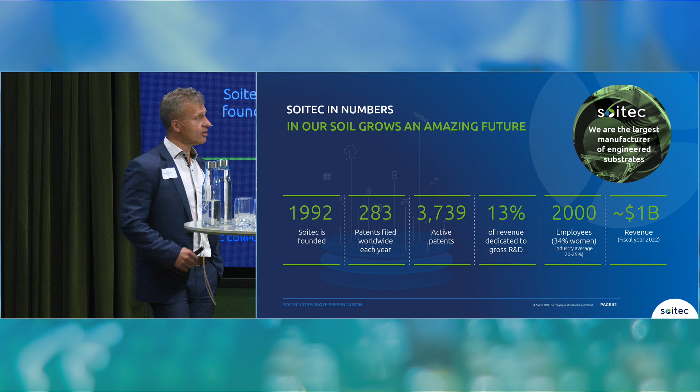So in a few figures: we have 283 patents filed worldwide each year, a total amount of patents of 3,700. 13% of the revenue is dedicated to our R&D. We have 2,000 employees worldwide and a revenue last year of $1 billion.

As I said, green innovation is key, and when you work on green innovation at the substrate and material level, you can leverage a lot of things because you are kind of agnostic, whatever the technology. We provide substrates for power electronics, for computing technologies, FDSOI, etc. So that's what we try to do.

Sustainability supports value creation and strategy. We drive the transition to a sustainable economy with innovation and operation. We leverage our inclusive and inspiring company culture and act to become a role model for a better society.

We are implanted also worldwide. So in France, in Bernin, we have a small capacity of production of gallium nitride, in Belgium, and another big factory for 300 millimeter in Singapore, and others are mostly support and sales offices.

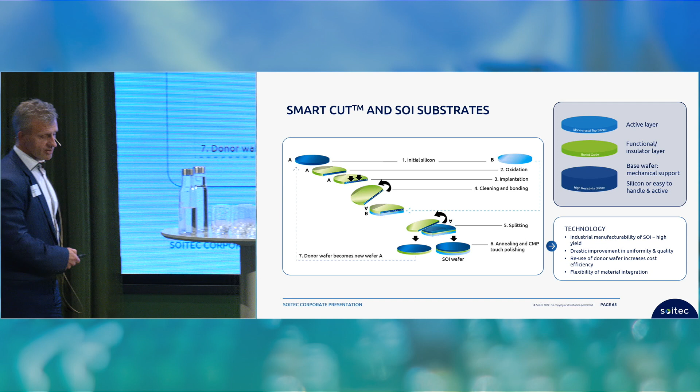I don't come back on this smart cut slide because I extensively talked about that. But basically, we can bond and we can smart cut quite everything on anything.

And we can target with the different materials, wafer A and wafer B, different applications. So you see the added value of the substrate material.

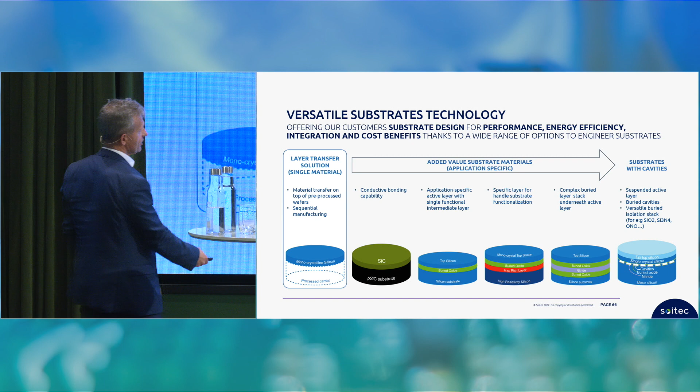For instance, the SmartSiC: this is the conductive bonding capability, and the fact that the polysilicon carbide here is very low resistivity. So the conductivity is very good, and you have gains at all the levels of the value chain.

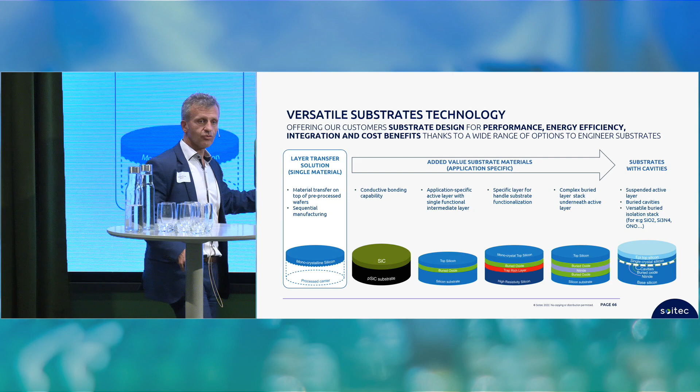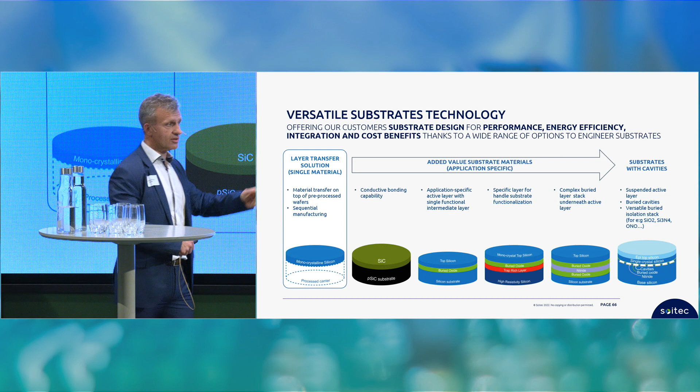Green Deal compatible technology. As I said, this is rejecting 4 times less CO2 than the state of the art. But at the same time, the manufacturer of components and the system makers can have modules that are smaller because the conductivity is much better.

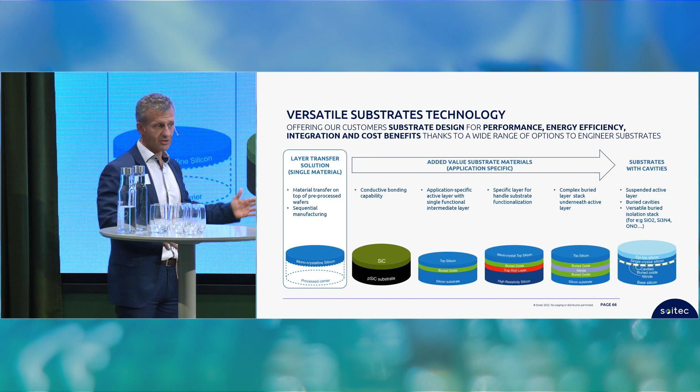And at the end of the day, I have to say that now, if you submit a European project, if you want to be funded, you have to stamp to be Green Deal compatible. You have to bring, because you will be very challenged concretely with deliverables, what is the total gain in the value chain that you provide with your technology in terms of Green Deal. Now Europe really wants to fund greener technologies.

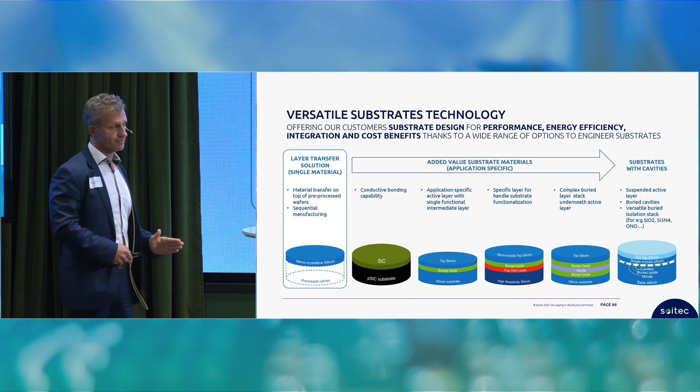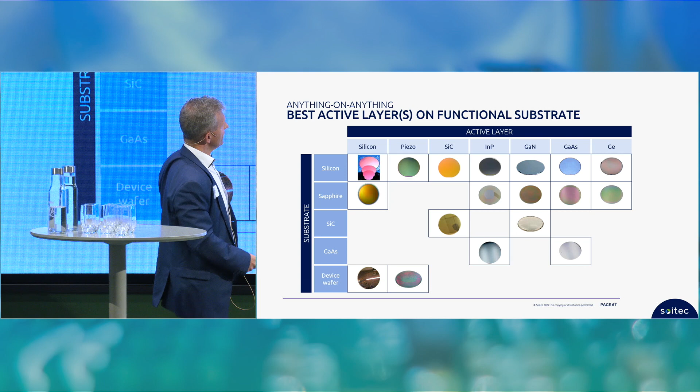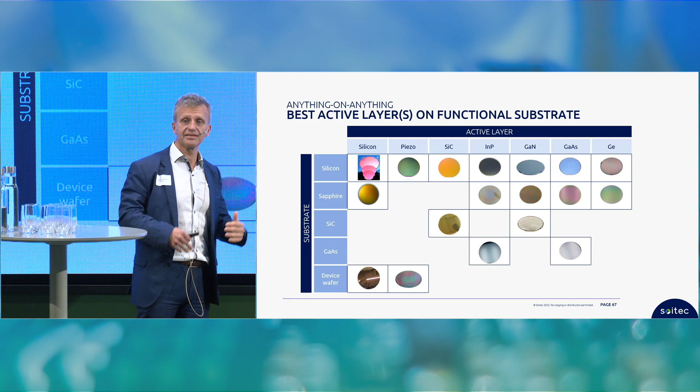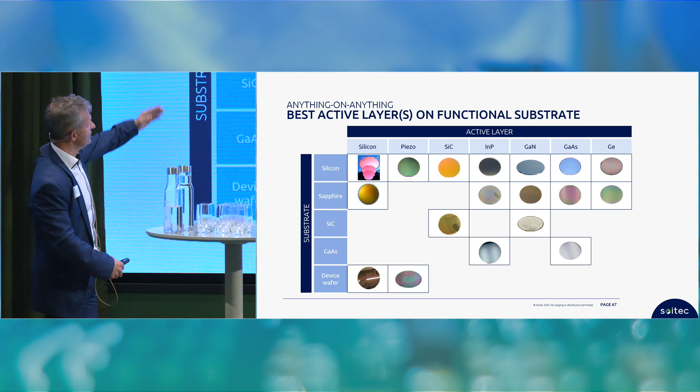And we can go beyond with the wafer A, the active layer. You can choose silicon, of course, piezo material, silicon carbide as I already talked about, indium phosphide for the 6G very high frequencies. We have a very interesting tiling approach, gallium nitride, gallium arsenide, germanium, and you can bond this on handle carrier wafers - silicon, sapphire, SiC, gallium arsenide - or device wafer already existing. That's our toolbox, and the innovation is playing with this.

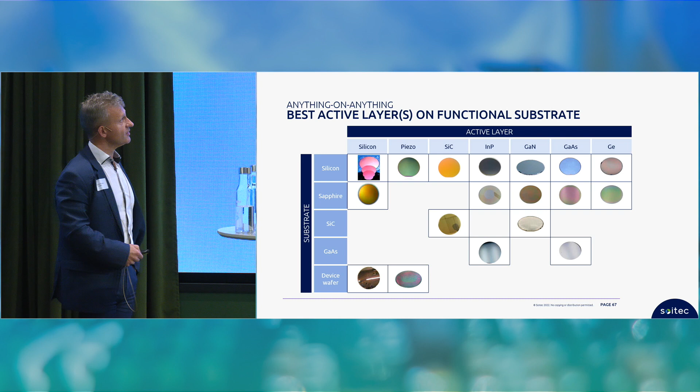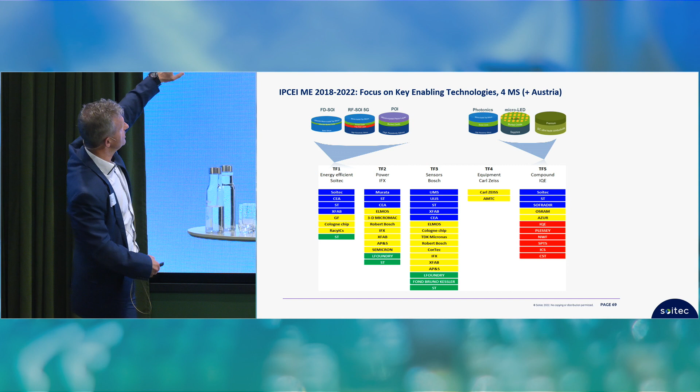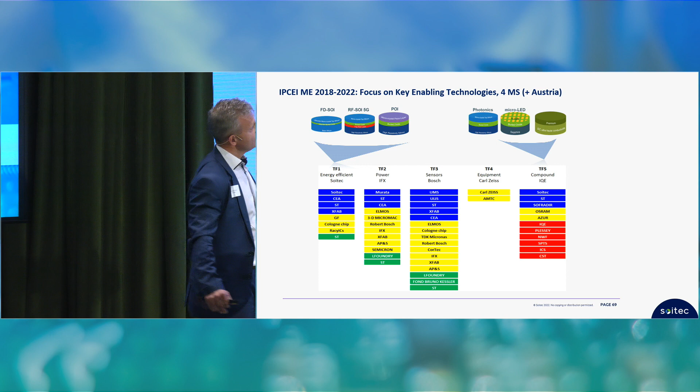In the IPCEI number 1 that Patrick already presented, we are in the TF1. We are energy efficient chips with 3 substrates: FD-SOI, RF-SOI, and POI. FD-SOI will be presented by Philippe. RF-SOI and POI will be presented by Cécile. And tomorrow you will have a presentation of the Smart SiC by Walter. So we are in the TF1 energy efficient chip and in the TF5 compound material.

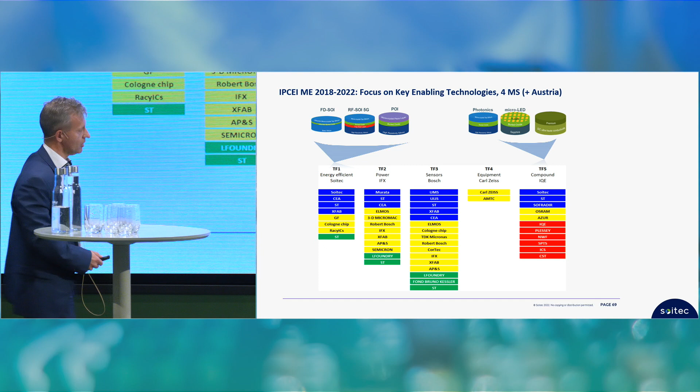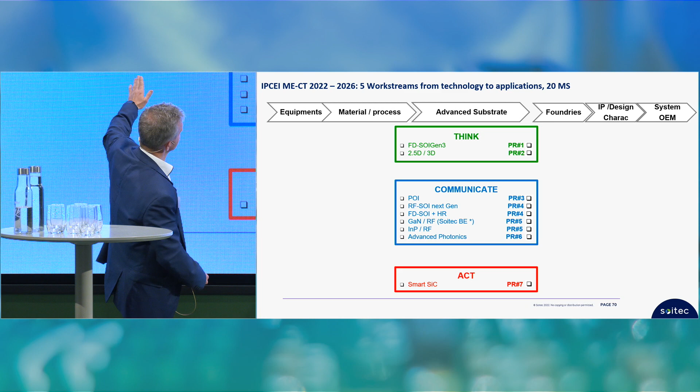But now with the new IPCEI, as I explained, this IPCEI is different. It's 5 work streams and 19 member states today, but soon there will be Sweden, so we'll come back to 20. And you see the number of projects is increasing.

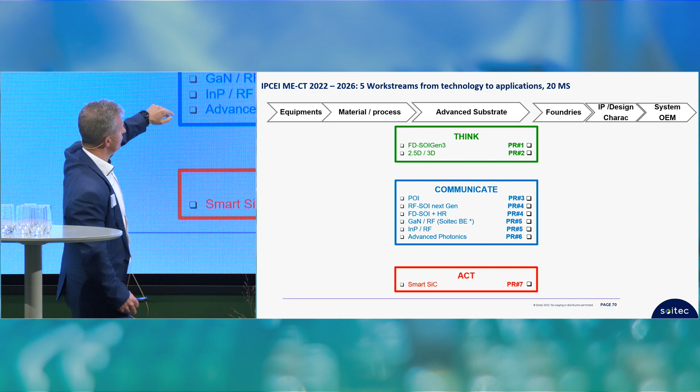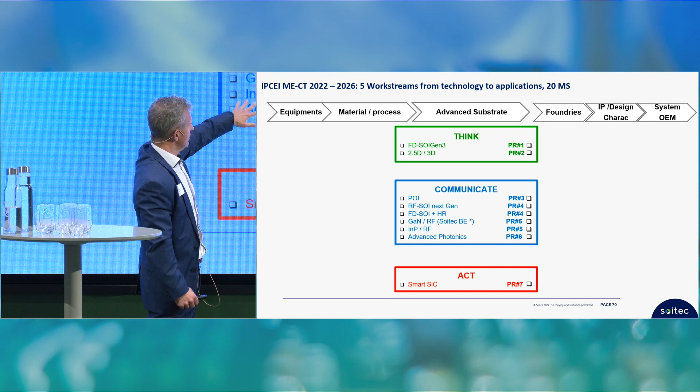We have FD-SOI, 2.5D, 3D stacking for the think approach. We have in the communicate the piezo insulator for 300 millimeter. We have the RF-SOI next generation for millimeter wave 5G. We have FD-SOI plus high resistivity base to have increased performance in terms of RF, gallium nitride on RF, indium phosphide, and advanced photonics. And of course, we have this new smart SiC substrate for the electrification.

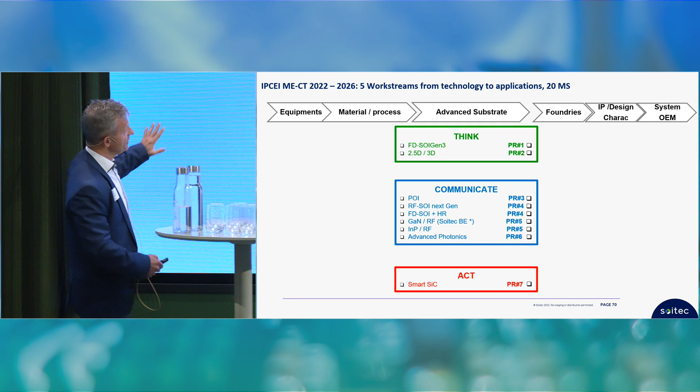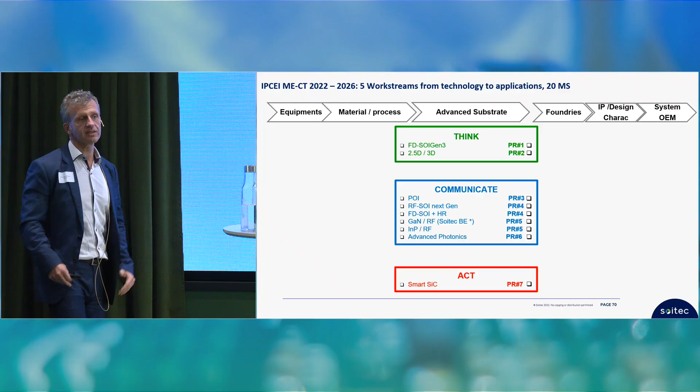And this is really an incredible dashboard for me, for Soitec people, to create links with equipment, material, process, foundries, IP design, and system actors. And we can create these links and build this ecosystem, strengthen this ecosystem, also in parallel in the European project like IPCEI.

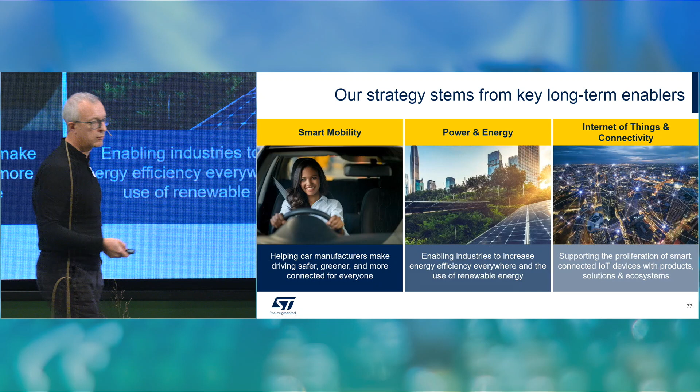So what are we doing? We work mainly on very long-term trends, so smart mobility of course, to have cars more secure, greener also. We work a lot on power and energy, so SiC component, GaN component, or also silicon component, where we still need to make progress - there's still some place for improvement. And of course we provide many chips for Internet of Things - microcontroller, RF component, many things for 5G and so on. So you can find us almost everywhere.

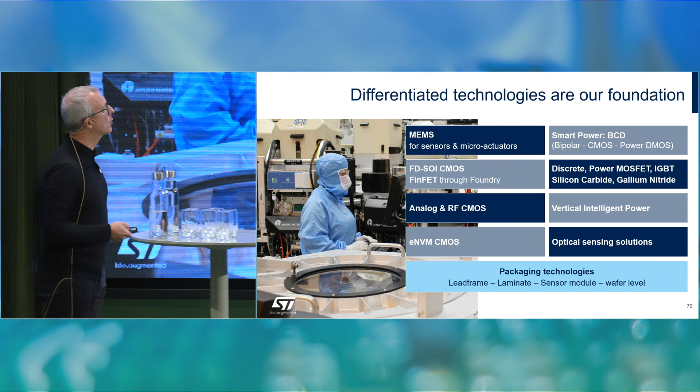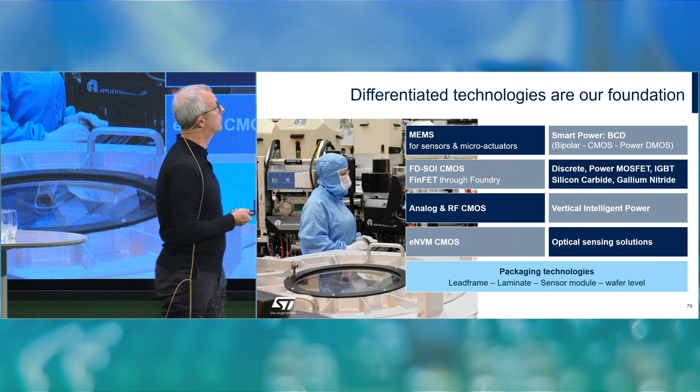The kind of component we are making: MEMS, microelectromechanical system, FDSOI, analog RF CMOS, ENVM stands for Embedded Non-Volatile Memory, so memory. Smart power, so special logic for power technology, discrete power, vertical power, optical sensing, and of course packaging. So we are making everything, very good.

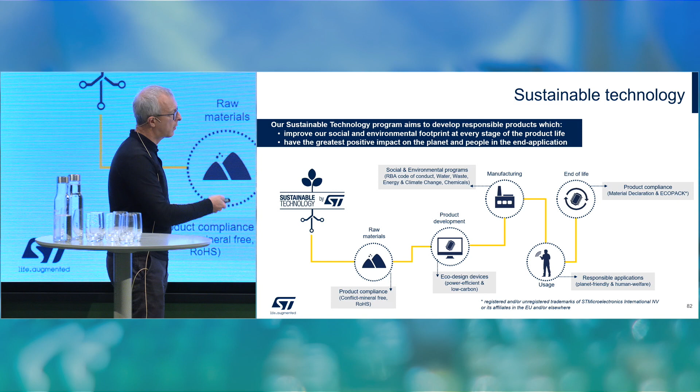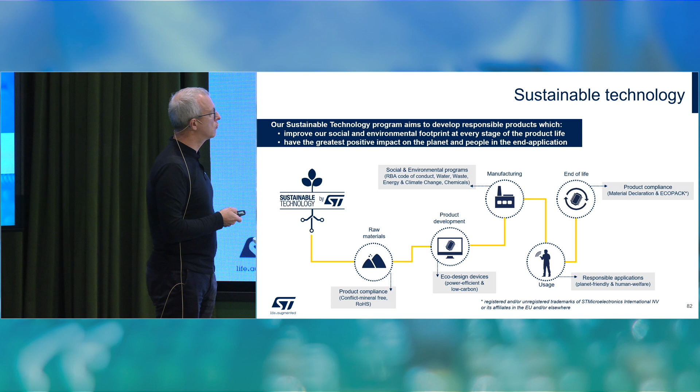Sustainability, so of course we are concerned with the sustainability, so we do many things. First, we take care of where we source our material, how we design the material, how we manufacture, because the manufacturing of a semiconductor is very expensive in terms of energy and water. So this is a real issue. So we are trying to do our best effort to minimize both things.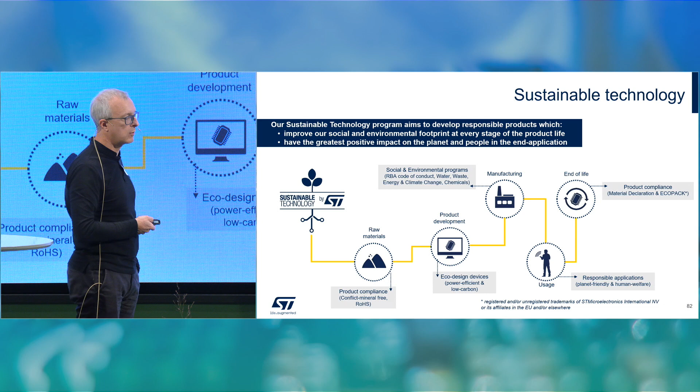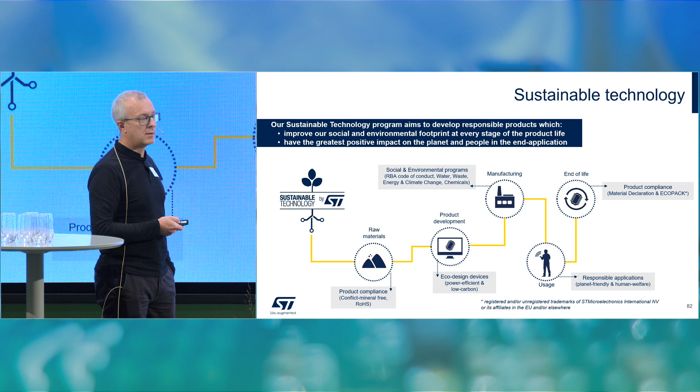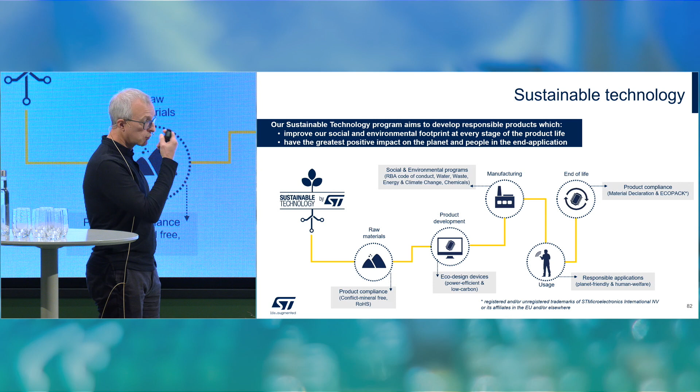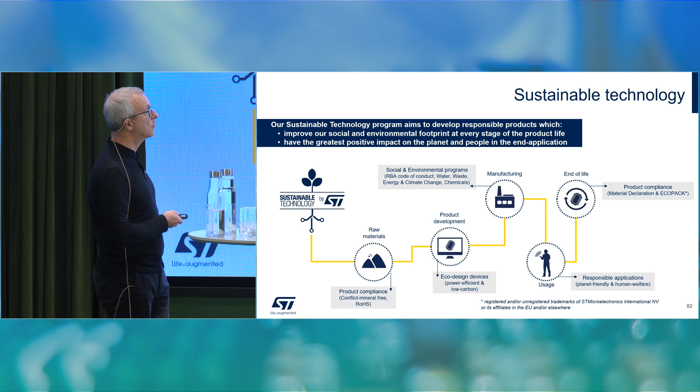And of course we provide technology which is environment friendly, because when you provide some SiC or GaN component, for example, if you deploy this kind of technology at very wide scale, you can save some energy plants, so carbon plant or nuclear plant. So this is very important. And of course, we take care also of how we can recycle our components. So this is very important for ST. For instance, ST also intends to be carbon neutral in 2027. So we will work on that.

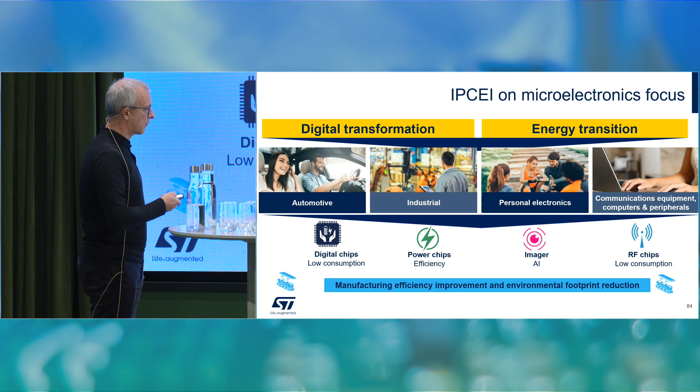So what we are doing, two main things: digital transformation, energy transition. So we find again our four pillars. We work on digital chips with low consumption, power chips very efficient, imagers with AI, and RF radio frequency chips. In parallel, we are working on the production system, our factories, to make them more efficient and use less energy. This is very important. We work on the design of the technology and on the way we produce it, both things.

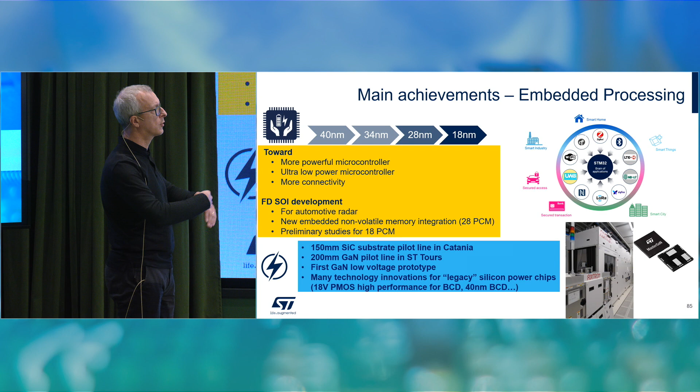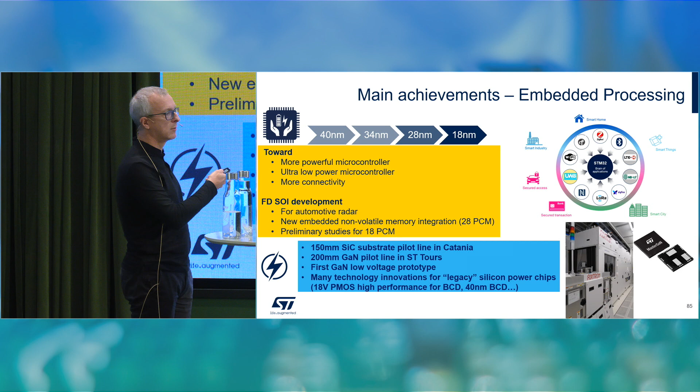For some examples of main achievements in IPCEI 1: we are talking about microcontrollers. Our target is to have more powerful microcontrollers, ultra low power, and full of connectivity, to have very autonomous components. We do this on 40 nanometer, 34, 28 nanometer. 28 nanometer is the size of the gate of a transistor. We try to go to 18 in the next IPCEI.

With this kind of component, we also want to develop FD-SOI again. We will make microcontrollers with this FD-SOI, and we want to use it for automotive radar - new microcontrollers with embedded memory, and also 18 nanometer.

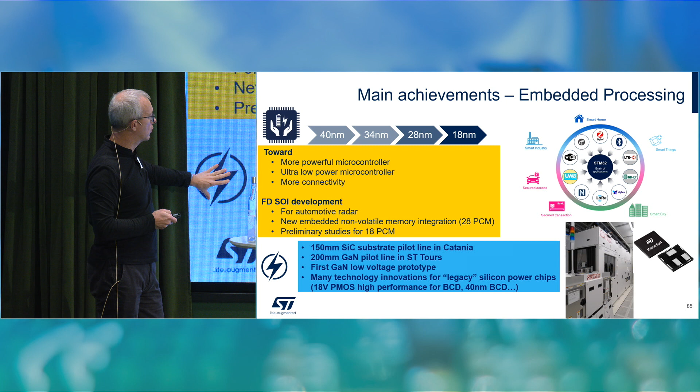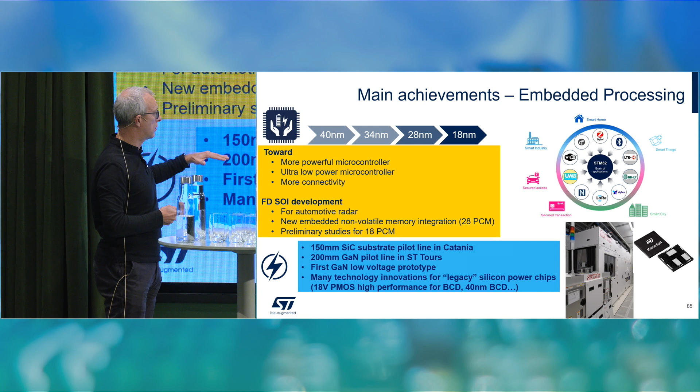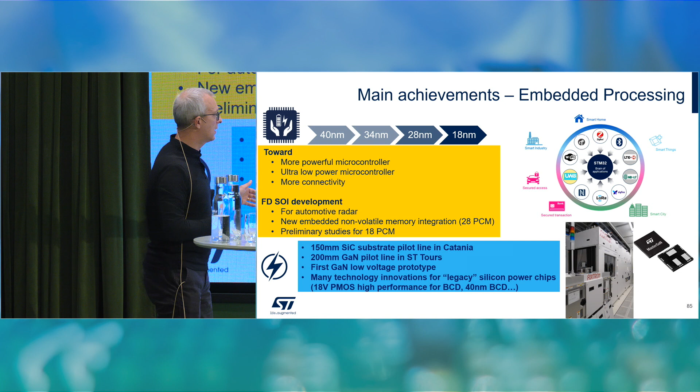Then we go to the power side. Here we work with SiC in 150 millimeter wafer size. We work on 200 millimeter GaN wafer size in Tours. We have demonstrated that this technology is okay, and we have also made many things. Sarah Louis from ST will talk about that. Tomorrow, I think, we will speak about the BCD technology, a special kind of technology for power application.

For the sensor side, we are making optical sensors. The main target is to have a sensor very powerful, very integrated, and very compact. The way to do it is to stack wafers - one wafer for optical, one for logic, one for memory, for example. We stack up to 3 wafers on top of each other. This is an example of 2, photosensitive wafer plus logical sensor, and at the end we have an integrated sensor. Very easy on a drawing, not so easy technologically to do in the fab.

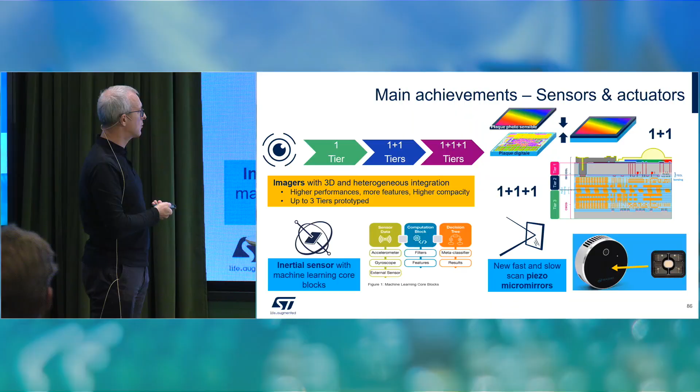We can do this stacking up to 3 today, and we are also working on other types of sensors. For example, for inertial sensors, you will have some explanation tomorrow. Also piezo micro mirror stuff, so actuators.

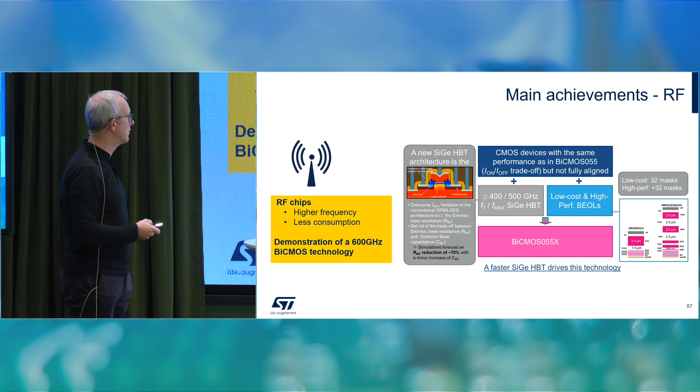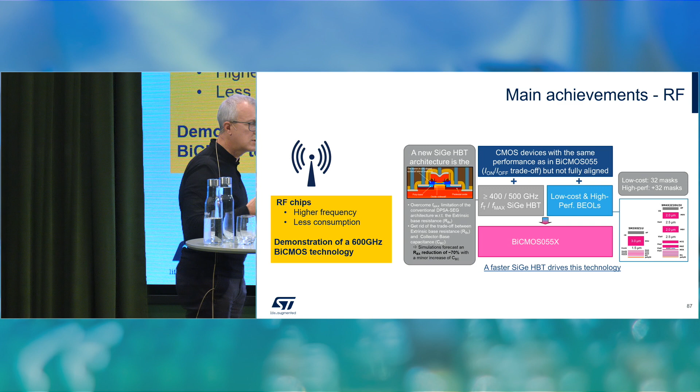Finally, for RF, we are making RF chips. The goal of the game is to go higher and higher in frequency to save energy, because the more capable the component is at going high in frequency, the more you can use it at low frequency and save energy at the end. Here we have made the first demonstrator of silicon BiCMOS technology up to 600 gigahertz, which is not bad.

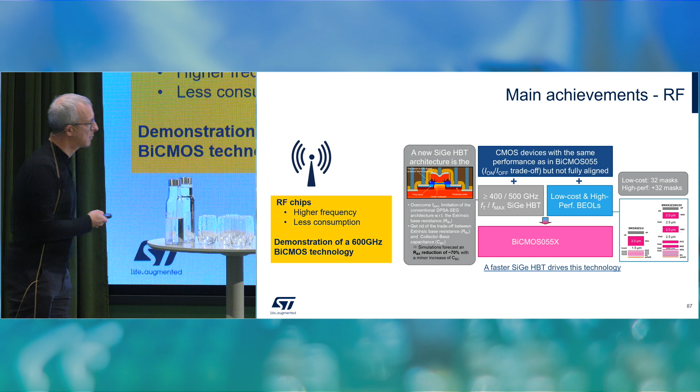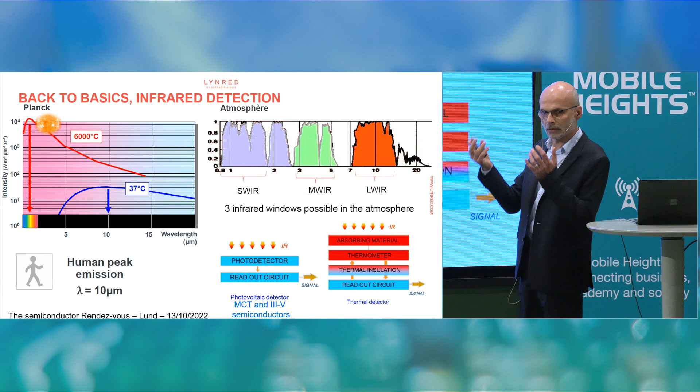We cover the wavelength range from SWIR, 0.8 micron, up to 14, 15 microns. We have two technologies. One, where we use photovoltaic detectors, meaning every photon creates electrons and holes - it's a photodiode, and that's what we detect to make the signal. And we have another technology, the microbolometer technology, where we have MEMS, very thin membranes under vacuum. When they absorb infrared, temperature increases, and we detect the temperature increase. So it's a totally different mechanism, but it works for the longer wavelength range.

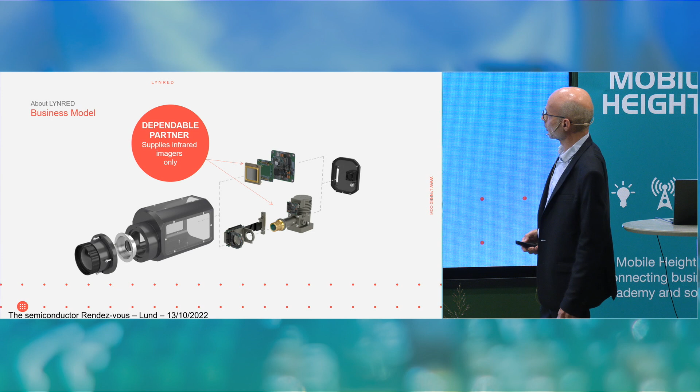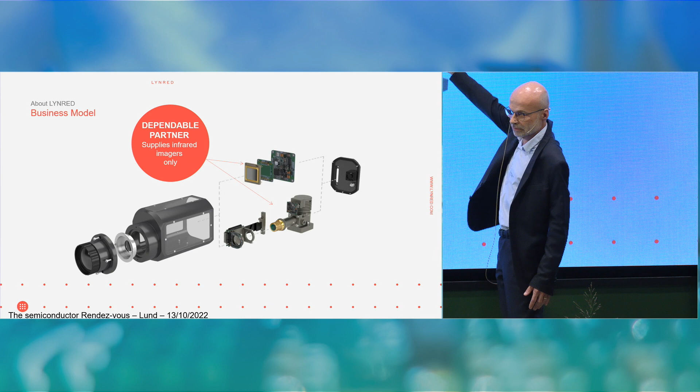So what we do, in the end, is this - you saw already some pictures of a product. It's either the small sensor here, uncooled sensor, or the big one here with the cooling machine for high performance sensors.

I won't go further into detail, but if you want to know more about infrared and the important parameters, you can go on our website, we have an e-learning module, and you'll know everything about NETD, pixel pitch, and so on. It's interesting, not too long, but interesting.

So what type of markets do we serve? I already told students this morning that applications are really, really multiple. We summarize here in 8 segments: aerospace, we have sensors in satellites, defense, surveillance, security, thermography for example, building management, outdoor activities, machine vision - that's the industry use of infrared for monitoring processes, for example smart building, and transport and mobility.

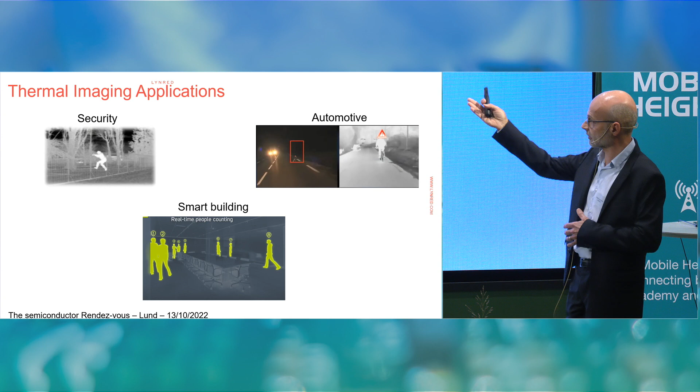So a few examples - security. At night, even without any visible light, you can see if people are trespassing. That's on the top left, trespassing barriers for example. Here on the right, the left part is visible light, the right part is infrared. At night, it's very difficult to see a cyclist or pedestrian on the road in visible light, because you have the car coming in front, and that's very difficult. Here with infrared, it's so much easier. So this is a technology that will be used more and more in vehicles.

And smart buildings - infrared allows you to detect how many people are in a room. So if you have a full building equipped with this, you can adjust temperature, air conditioning, light, and everything in the building, and save on energy.

So that was one use of infrared. Basically, you collect everything and make an image of it. There is another way to use infrared: to look at specific wavelengths and extract other types of information from this.